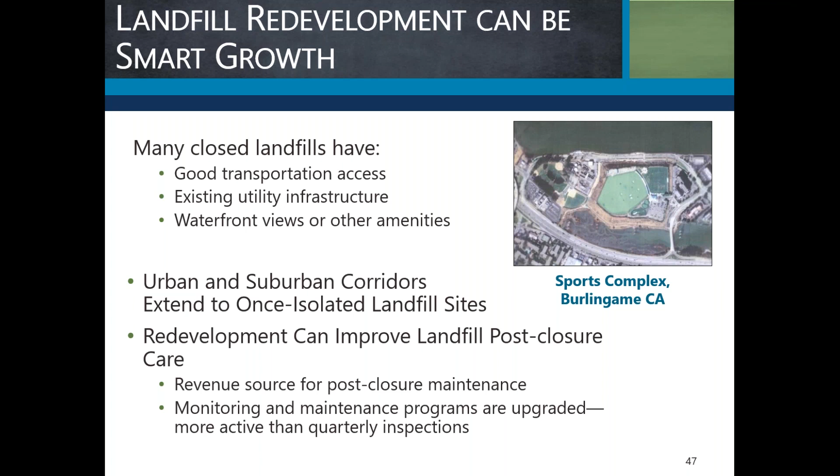So active management of an old closed landfill, I think, can really improve post-closure care. And with that, I'm going to turn it over to my colleague, Joe Miller, to talk to us about some of these technical issues.

Very good, thank you, Mike. That was a great presentation on the regulatory and legal framework as to what administrative measures are needed. I'd like to spend a few minutes talking about the technical issues to be considered as part of any landfill development.

Basically there are two things at play. Number one, and this is what makes landfills different than a greenfield or brownfield site, is that the ground moves, so you have to account for that. Number two is that what's in the landfill generates landfill gas, primarily methane, which can create a safety hazard.

As Mike mentioned, there are also other issues about constructing on landfill sites, mainly maintaining the infrastructure that's there for environmental protection—whether it's the clay cap that was placed, the cover and drainage systems, or any liquids collection system. These have to be, if not enhanced, sometimes replaced. That's what you called, Mike, the appropriate steps.

All right, so let's move on and take some examples. We can't talk about all these things today, but just a few.

What happens when you put garbage in a landfill and cover it with dirt? It undergoes a few processes. One of them is decomposition—any organic material is going to go through biodegradation and convert from solid carbon into gaseous methane. All right, and that's one thing.

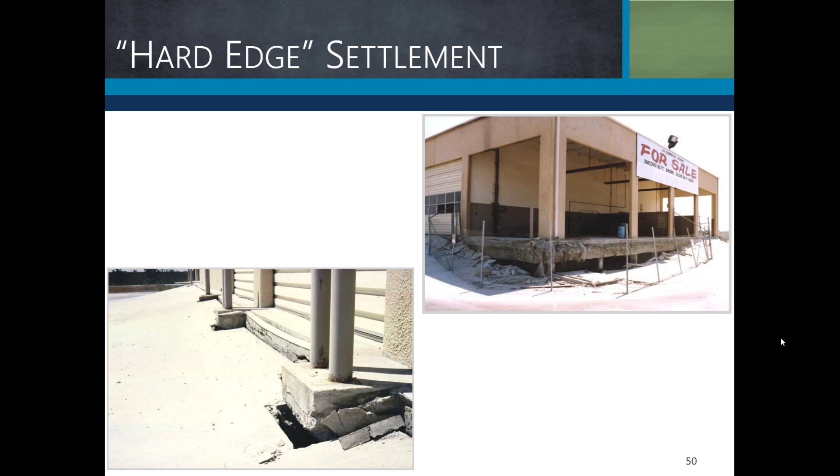That can create a lot of problems, not only for getting in and out of the building, curb and gutter, and traffic circulation, but also for utilities that can break—ruptured water lines or sewer lines—and all kinds of bad stuff. These challenges can be overcome with good engineering, good construction, and dedicated post-closure care. So we'll move on to the next.

Back to settlement—what do we do to take care of that? The first thing is site preparation, making the ground ready for development. One option is to excavate and replace the waste with good, clean structural soil or fill. That can be expensive, particularly for a landfill site with many hundreds of thousands of tons of waste—it's generally cost prohibitive.

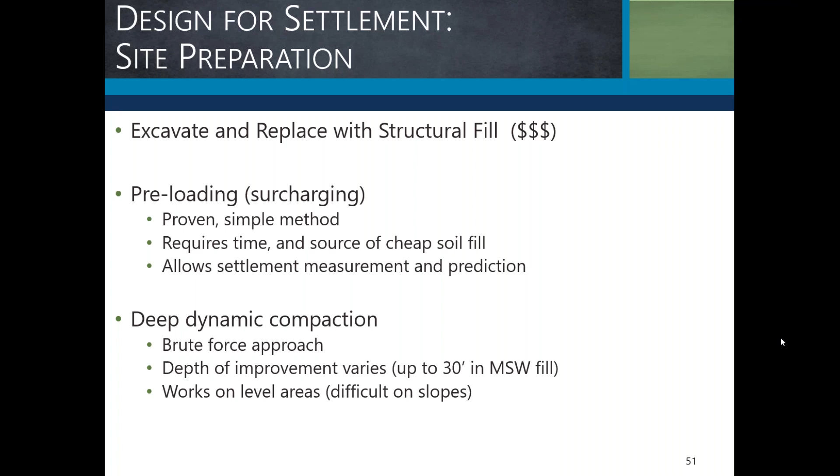So there are other methods that can be done to prepare the site. If we move to the next slide, one of them is called preloading or surcharging. Here we have an example of a site in Southern California, an old landfill.

It was originally a quarry, then it was filled with trash, and now it's going to be a parking lot for adjacent commercial businesses. It's got some low spots and some voids. This is called surcharging.

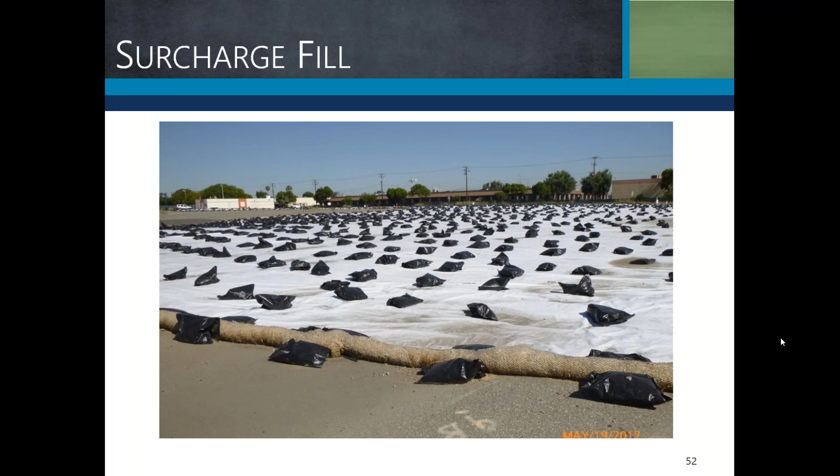It's a pretty proven simple method. You put clean soil fill on top of the landfill and let it wait, and what it does is accelerate that settlement over time. It requires a bit of time and a source of cheap fill, but it allows you to measure that settlement over time, and that may be possible when you have phased construction. In other words, you're digging up dirt from one part of the site and need to put it somewhere else, so let's put it here and do some surcharge fill.

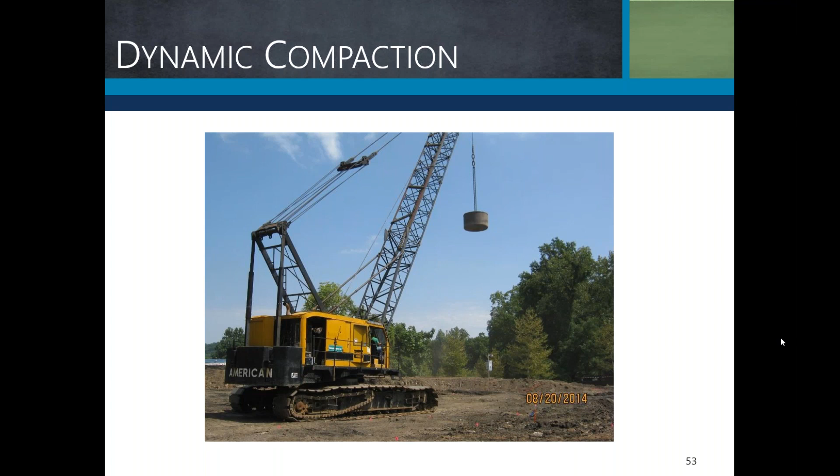Another method is called dynamic compaction, again to accelerate this settlement. This is what we call the brute force approach. In essence, take a big heavy object and drop it from height and compact the landfill artificially, if you will. This is limited to sites that have garbage and waste underneath 20, 30 feet, so it doesn't apply to deep fill sites, and it only works on level surfaces, not necessarily on slopes. But after my dream job, this would be the second: the wrecking ball operator, the operator of that crane doing dynamic compaction.

So that's about site development. What about buildings? There are a number of mitigation measures that can be employed to make buildings structurally safe. They are deep pile foundations, that is driving, in essence, stilts into the ground to hold up the building slab. They can be steel, precast concrete, or even tube steel.

That's one method. There's also another method called drill displacement columns, which is coming into vogue now. It has different names in different parts of the country. In essence, for the foundation, you drill down and backfill with grout as you go. Sometimes you can place the reinforcing steel in that grout mix before you move on. Then you put engineered soil mat on top of that, and then pour your traditional slab on grade foundation on top of that. Some have called that akin to sleeping on a bed of nails, and it's been favored by regulatory agencies because it protects the groundwater by providing a grout seal where the pile penetrations go into the water table.

There are also some other methods. But which is best? Every time, geotechnical and structural considerations govern. I always defer to the structural engineer: what will hold the building up? There are things you need to consider to prevent contaminant migration and minimize waste spoils, which can be expensive to haul and get rid of. But you want to balance all of those with overall cost.

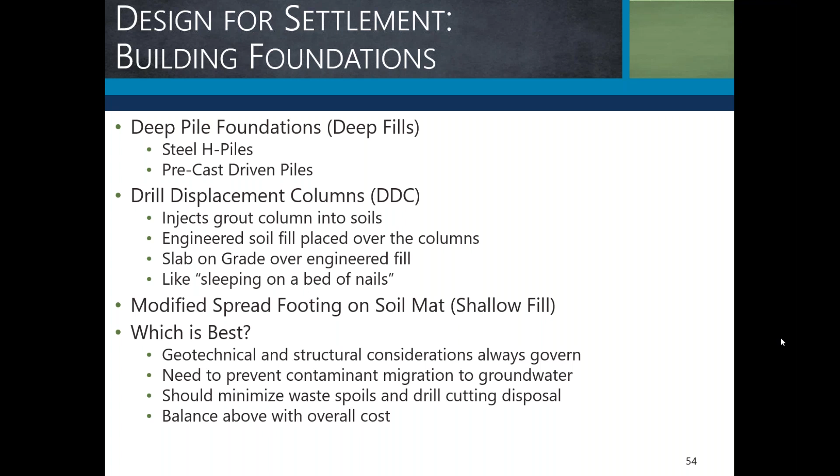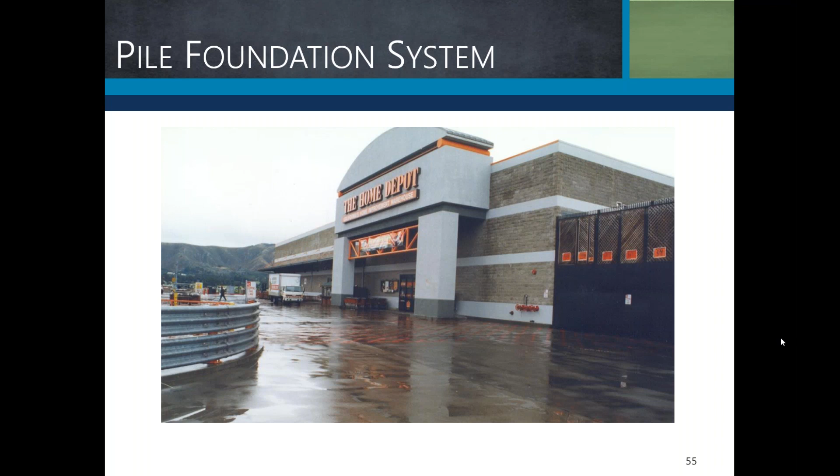Next slide, please. Here we have an example of a pile foundation system. Mike asked earlier, who in the world would want to build something on top of a landfill? Well, here we have a prominent home improvement center built on top of a 100-foot deep landfill. Why? Because there's opportunity. This happens to be in an urban area that is severely underserved by construction materials and supplies. That retailer's facility near San Francisco happens to be the company's highest grossing facility in the country per square foot, and it's on an old landfill.

Well, this designer came up with a hinged slab. Imagine, if you will, a series of what look like piano keys forming the apron to the building. Only these piano keys are 20 by 80 feet, solid concrete, fixed on one side, so that as the land settles, you can come in later and jack up one side, so that you don't have shopping carts rolling downhill, et cetera, et cetera.

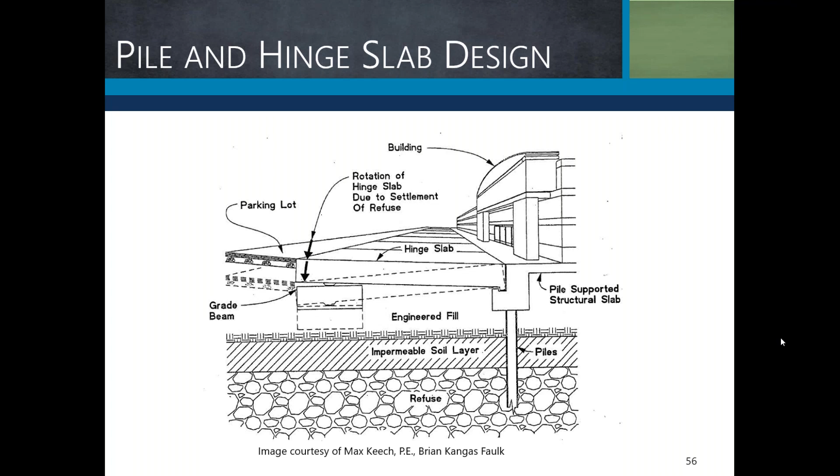So that's some things for dealing with settlements at landfill. The other big issue is methane gas protection.

We mentioned earlier that decomposition creates landfill gas, which under certain conditions, if it could infiltrate into a building through a slab crack or a utility penetration, get into an enclosed space and there's a spark, it could cause an explosion. That's very, very rare in the industry, but it can happen.

And with good engineering, we can mitigate against that, and there are a number of mitigation systems employed. I'm guessing many here are familiar with vapor intrusion—well, they're the same kinds of things. Frankly, the vapor intrusion business stole from us landfill engineers with these methods, and they include active gas extraction to pull it out of the ground, put it in pipes, and send it into a flare and burn it, or send it through a carbon filter. We have membrane barriers and venting systems and other utility collars that also work.

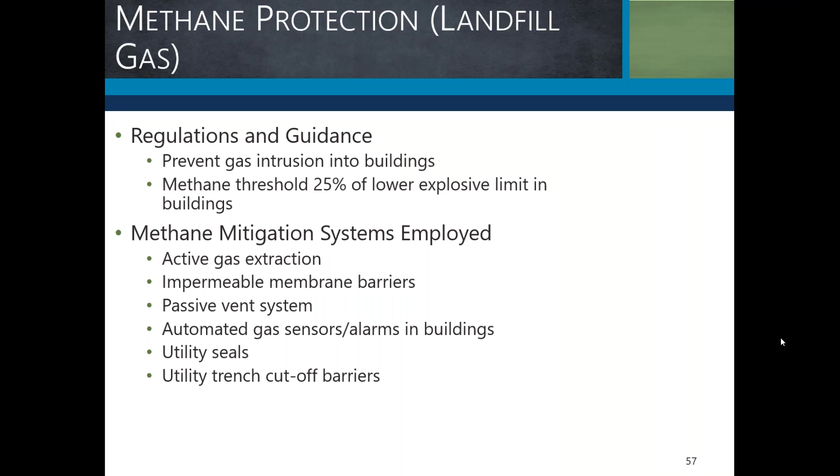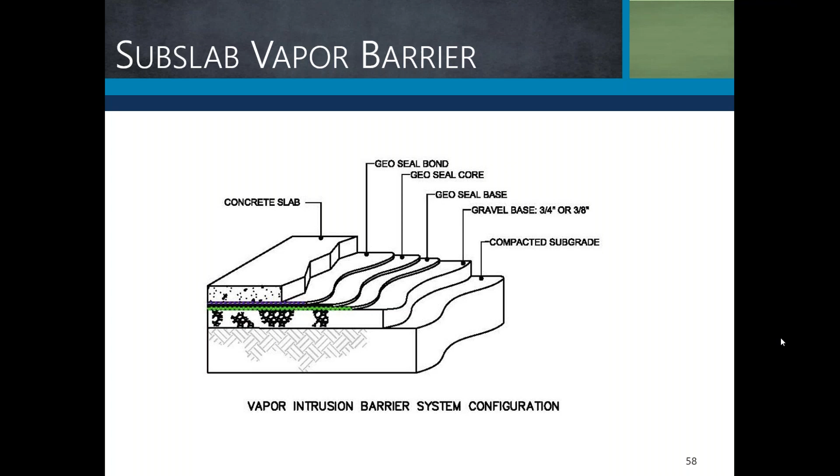So what this product does is it has a bonding agent that sticks to the concrete. In essence, it's like the top of a kitchen sponge. So when you lay your membrane down with this kitchen sponge layer on top, the concrete adheres to that and it sticks to the bottom of the slab later. Very cool product.

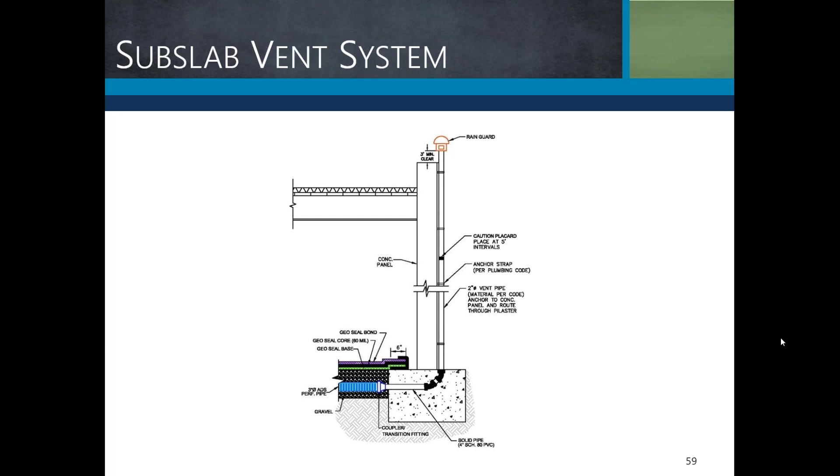Part of a methane mitigation system is not only an impermeable membrane, but a venting system. Here we show an example of a subgrade pipe below the building slab. This one happens to be flexible pipe because, again, we may see settlement, so that pipe has to bend. It has holes in the pipe to collect the gas, and then it whisks it up the side of the building into a spinner vent.

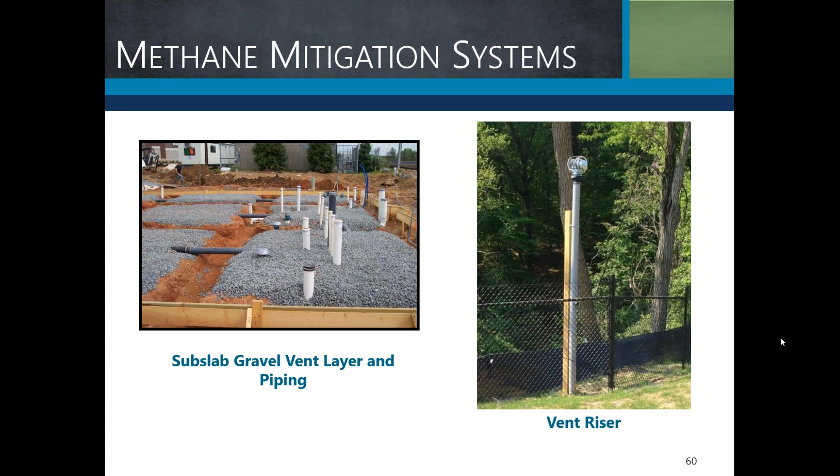Here we see some examples of those systems under construction: a gravel bed before the membrane is sprayed on, and before the slab is poured, with some of the pipes traversing what will be a grade beam for a foundation. On the right, you see a vent riser where the gas is collected and goes to a spinner vent and ventilates harmlessly to atmosphere.

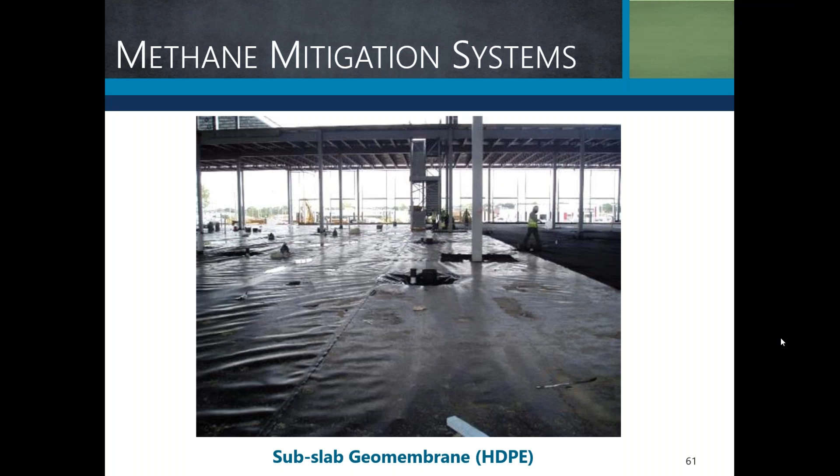So Mike asked earlier, who would want to do this? Well, an important consideration is what does it cost? In our experience, these special foundations to mitigate settlement can be anywhere from 2 to 4.5 times the cost of a traditional slab-on-grade spread footing, and those costs depend on where you're located, your underlying geology, and a lot of different factors.

The methane mitigation systems can range anywhere from $4 to $12 a square foot, including an alarm system in the building would be on the high end. All told, we've been told by contractors that the incremental environmental costs for building on a landfill can be 25% higher than on a greenfield site.

So with that, we'll pause for a second with a poll question. Our poll question is, after all you've heard, is there anybody in their right mind that would want to do this kind of thing? The question is: I wouldn't want to touch a landfill development with a ruler, a yardstick, a 10-foot pole—I wouldn't touch it at all. Or, I'm that kind of person, I like challenges, I could do it. So let's open the poll.

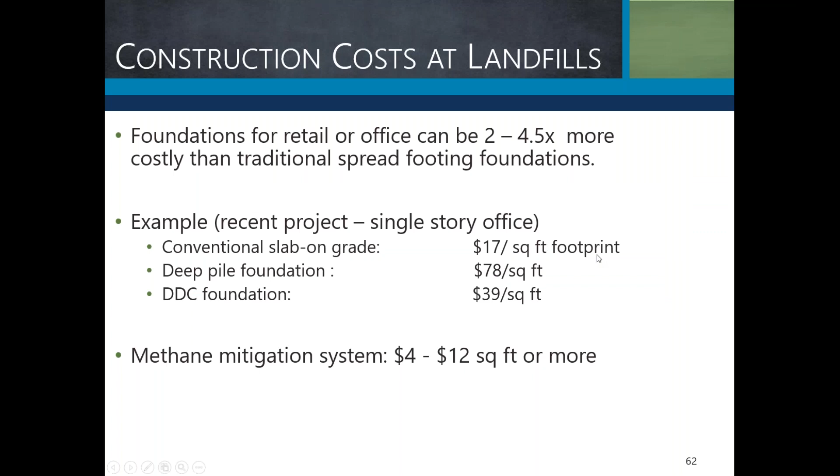So, a 45-acre landfill, filled in the 1940s through the 70s. The development entailed 20 buildings, nearly 1 million square feet of office space for the tech sector. And many tenants there you'd recognize - their social media, their communications, their photo share sites, their famous companies. This particular project, an old landfill, has been income producing for nearly 18 years.

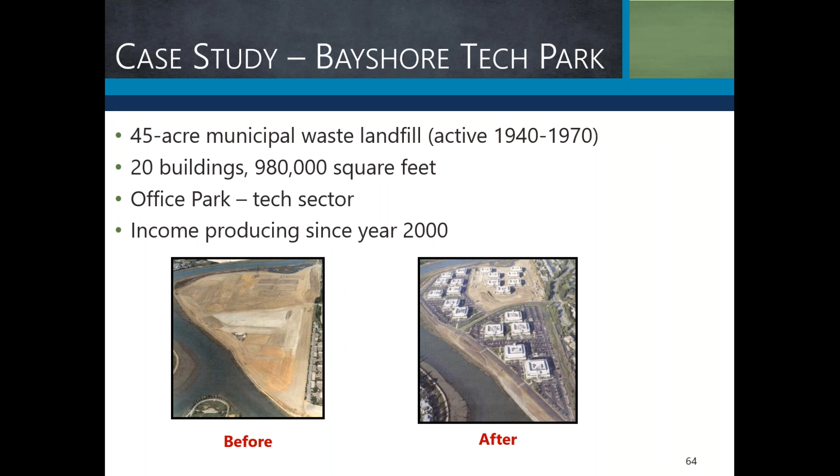And there's some pretty cool things that were done to make this project possible. Many of the things we talked about, pile foundation. In this case, there were over 2,200 piles driven through 40 feet of trash and into the underlying geologic unit - in our case, the Bay Muds of San Francisco Bay. There are also some floating utility connections, flex pipes, utility vaults that could be moved and jacked so that repairs were made easy, and a methane mitigation system that was very robust, very similar to what I described before.

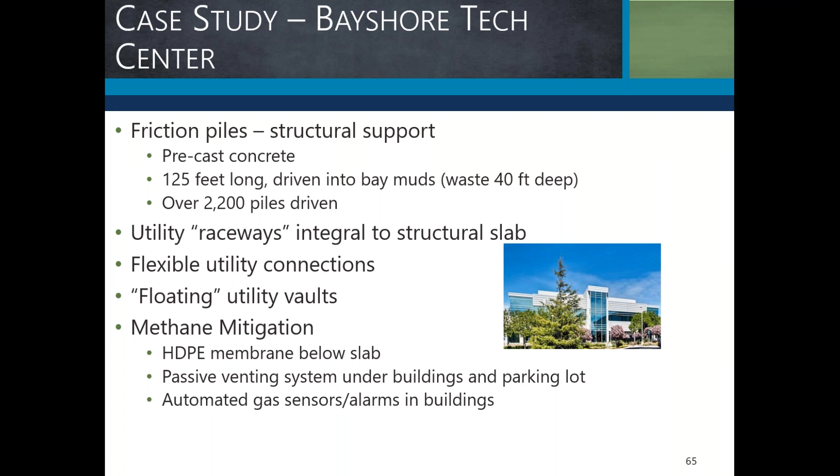One thing I will mention that made this project very unique - what are called utility raceways. You might recall an earlier slide that had the picture of the ground settling away, and how could you possibly put utilities under a building? Well, you don't want to do that at a landfill. So they built, integral to the slab, trenches - imagine 3 foot wide, 3 foot deep, with the top of the trench being equal to the floor of the building. The developer knew there'd be high-tech tenants coming that wanted to do lab work, research, and they would need communication. So that allowed them the flexibility to bring in new tenants and have their utilities be safe from the effects of settlement. So that's been a very successful project in the Bay Area.

So with that, I'm going to conclude and hand the baton back to my colleague for a case study on the East Coast, and then we'll wrap and have time for some questions.

And so that's a little bit of a sense of what that landfill was like. It's about 60 feet deep at the deepest parts, and it covered 60 acres, and it happened to have a Washington Gas light easement right across the middle of it, so we had 30 acres on the eastern mound and 30 acres on the western mound.

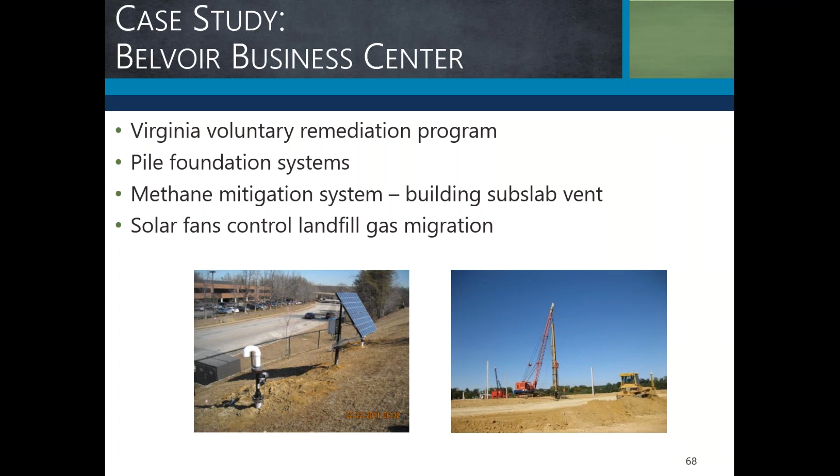So what are some of those takeaway points that we wanted to leave you with? Some of those keys to success. My bumper sticker is, I think landfill redevelopment can indeed be smart growth. It can be ideally suited to almost any land use, and it can take advantage of existing infrastructure.

It does require an owner who's willing to do the right thing. This is not simple stuff. It's not all that complicated either, though - I mean, if you met Joe or I, you'd know it's not that complicated. But they do have to want to do it right. It's important to do it right, to take care, to study it properly and design carefully, and then make sure that what is promised in the design gets constructed.

If you've got sound engineering and a good contractor and attention to maintaining these systems, you will overcome these challenges and have a successful project. And I talked about active management of an old closed landfill. Developing a site, or having a revenue-producing site with retail businesses paying rent, provides a revenue source that can be used to make sure the site stays safe and is maintained properly. I think these are some of the keys to success.

With that, I'm going to stop talking and wait for questions from the audience.

All right, this is Joe, and we have some questions coming over the e-waves. One individual asked, do you have any best practices for dealing with tires in landfills? In our case, they're rising to the surface and poking through the cap.